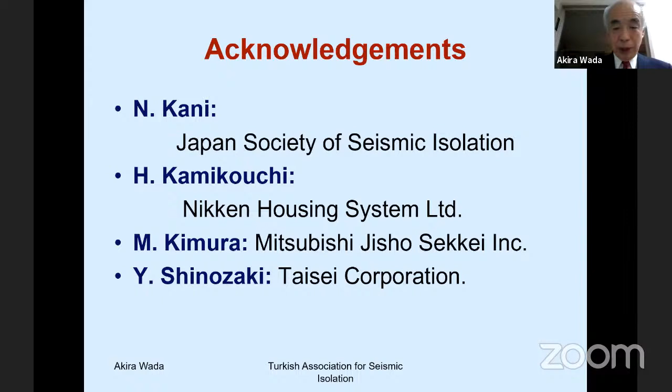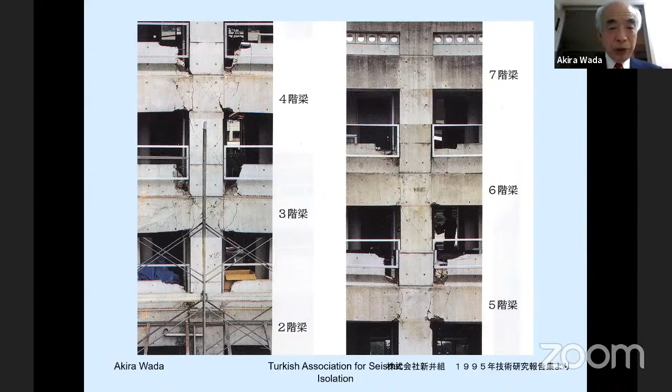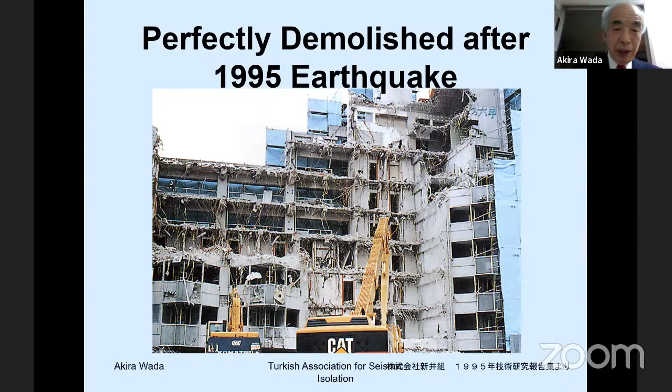After this earthquake, they demolished this apartment building like this. People had to find new apartments, and they lost a lot of money. All the trucks bring a lot of garbage produced by collapsed or demolished buildings.

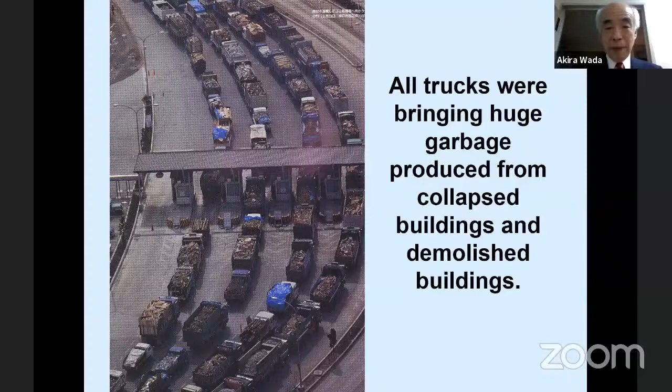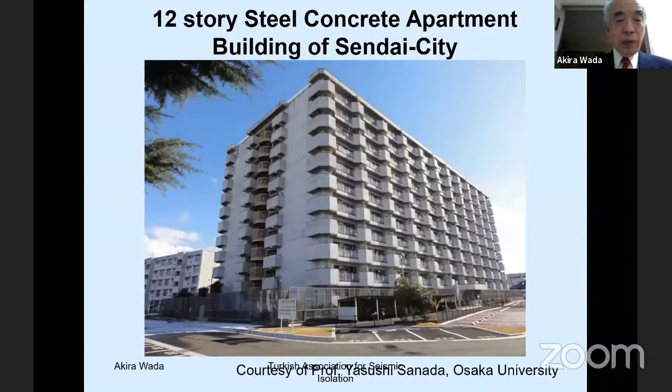This earthquake happened at 3 o'clock in the afternoon. There were mothers and children present; the fathers would not have been there. March 11th was a Friday, and the mothers and children got very scared, so they didn't want to live in the same apartment anymore. This apartment was also demolished.

The young professor, Yasushi Sanada, checked all cracks around the structures. The east frame has 12 columns and 11 non-structural walls. The non-structural wall is a little wider than the column, and the thickness is only 10 or 12 centimeters, with not much reinforcement. The cracks around the non-structural wall are very large, from first floor to sixth floor.

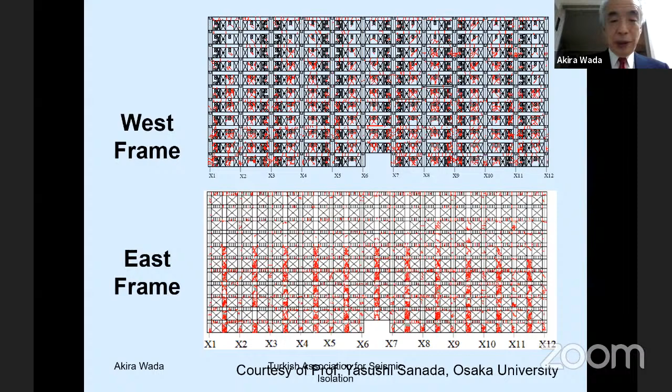On the west frame, there were doors or windows, a very complicated non-structural wall system. Many cracks from ground floor to 12th floor. Also, people don't like to live in this building after the earthquake.

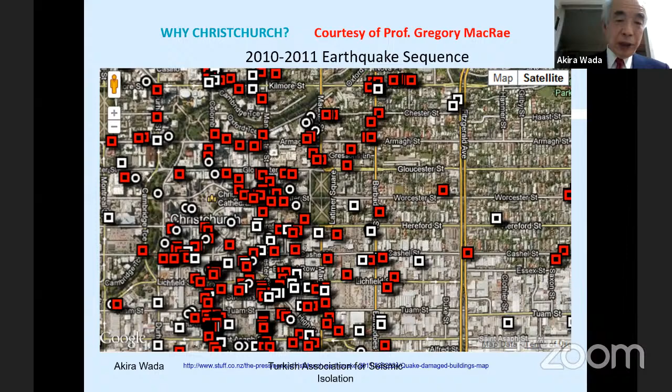There is a very famous university for earthquake engineering, the University of Canterbury. Gregory MacRae is my friend, and he gave me the map of Christchurch. The red square means the demolished building. You can understand that two-thirds of the buildings were demolished.

Our responsibility and our mission were not satisfied. We are structural engineers and earthquake engineers, but after a big earthquake, many buildings were demolished. I don't like this situation. But the professors in Turkey, Japan, New Zealand, and the United States recommend ductile frames to students.

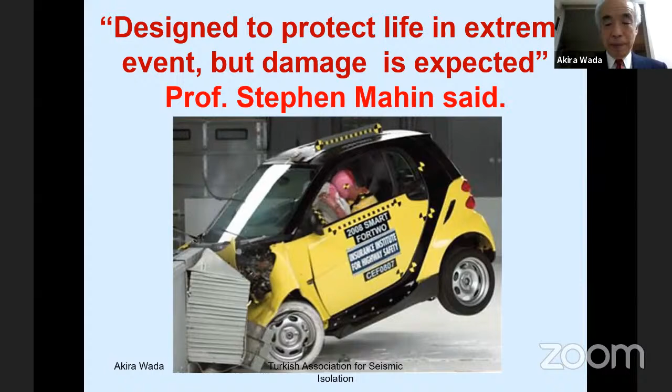I showed several photos after the earthquake. Damage is expected, but people's lives will be okay. But in a big city like Christchurch, Istanbul, or Tokyo, there are too many buildings designed with the ductile moment resisting frame. Many buildings will have some damage, and after that, people don't like to use these damaged buildings. The city life will not continue. We have to consider not only one building, but also the total city.

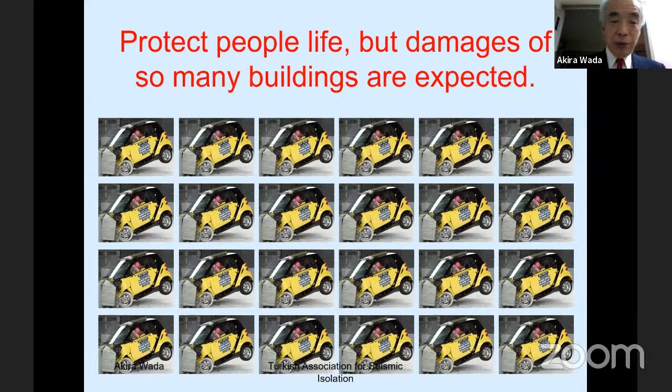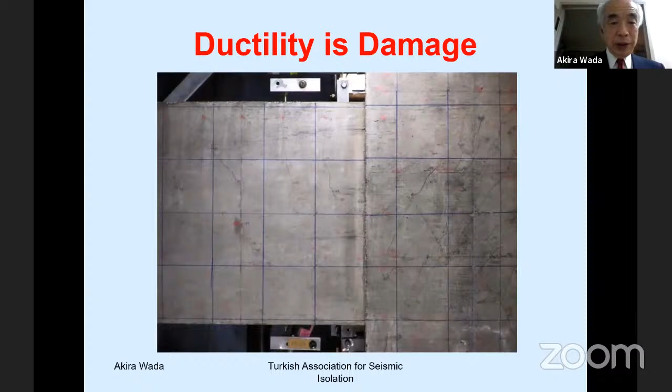I tested this almost 20 years ago. The right-hand side is the column, the left-hand side is the beam. This is very ductile reinforcement, but there are many cracks, not only at the end of the beam, but also at the beam-column joint.

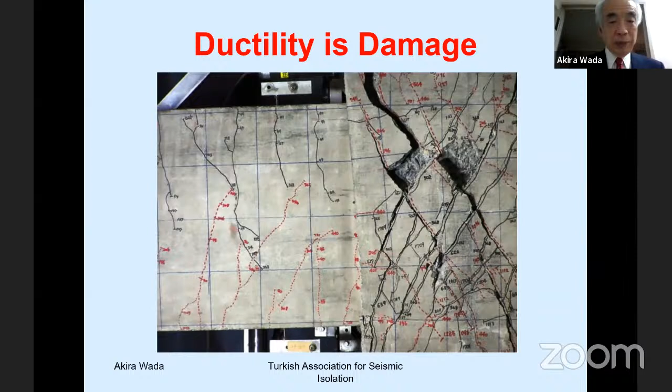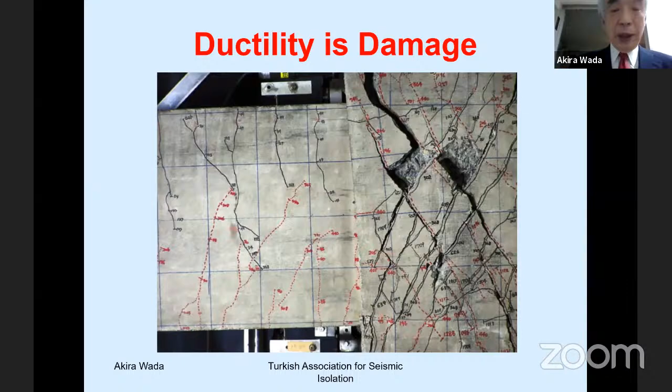Professor Vitelmo Bertero says the ductility is damage. We have to reconsider how to make better structures in earthquake-prone countries.

This is the new seismic design concept: human life has to be safe, and the building should be okay and usable after some repair. People can understand this idea, and some very important new buildings must be usable just after an earthquake—not only government buildings, but also residential buildings. Houses must be safe after the earthquake, since people have to sleep with their family every night.

Many researchers said the house is not so important, that government buildings are more important. But I don't like this idea. The house is most important.

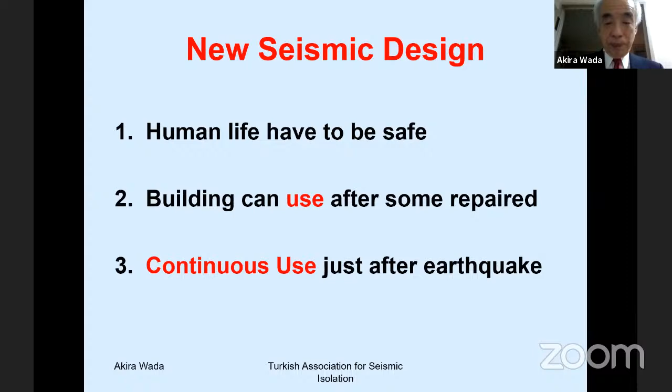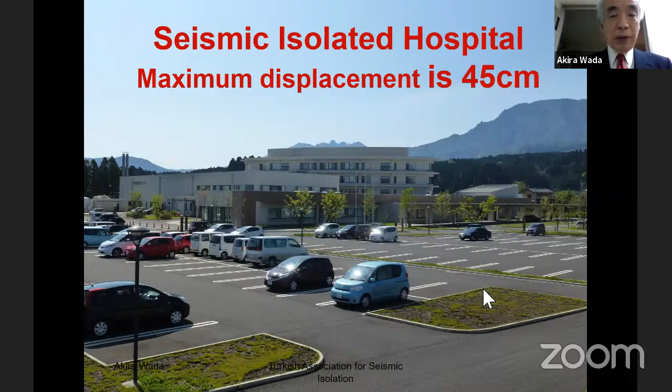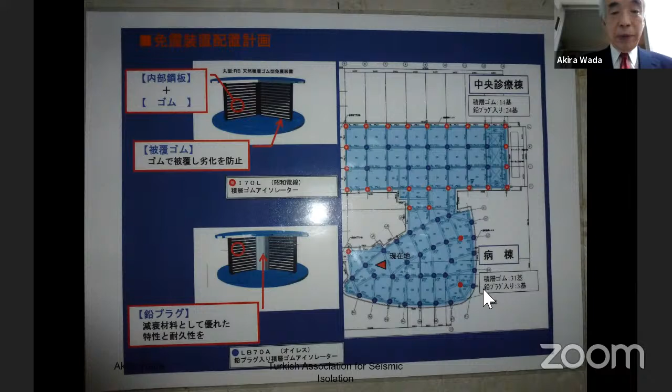The displacement was 45 centimeters from southwest to northeast. This 45 centimeter displacement will be the largest deformation of seismic isolation buildings in the world, I think. But this hospital is perfectly okay after the earthquake.

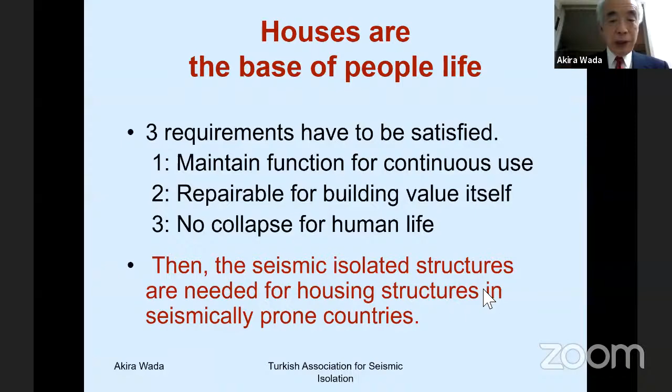And for houses, the base of people's life, as I already explained, we need maintained function and continuous use, repairability for the building's value itself, and no collapse for human life. So seismic isolated structures are needed for housing structures in earthquake-prone countries.

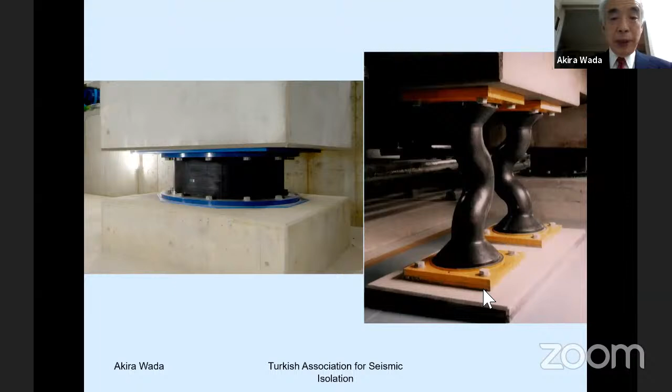In this district, I think there are 6 or 7 seismic isolated buildings independently. The tallest is 12 or 13 stories, the lowest is 5 or 6 stories. But these buildings were designed with seismic isolation, using natural rubber bearings and lead dampers.

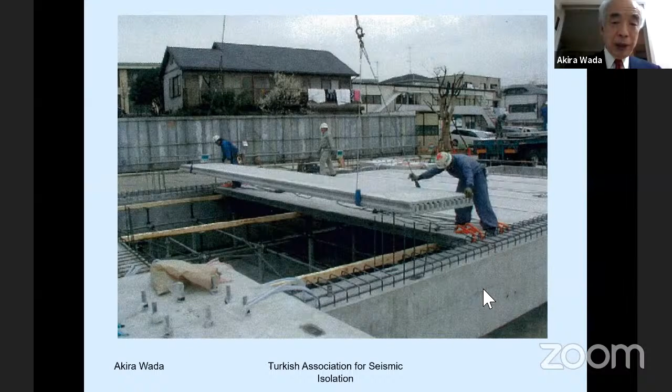When we design apartment buildings using seismic isolation, as you know, the horizontal force is not so large, almost 10% of the weight. The seismic horizontal force is very small compared to a fixed base or conventional structure. So we can use a precast concrete system in Japan, and there are many expansion joints.

About 10-story buildings. When we designed seismic isolated 10-story buildings, design shear force of the superstructure is about 8% to 15%. And the shear force response in isolated layer, including some damping system, is about 13% of the total weight. The floor response will be 0.15 to 0.25 G. Displacement in the isolated layer, 30 or 40 centimeters.

But in the Kumamoto earthquake, 460 millimeters - we have to consider about 50 centimeters, I think. And the story deflection in the superstructure is very small, less than 0.5%, I think even smaller.

And the construction cost when the building is 10-story is almost the same construction cost, or a little cheaper. Japanese reinforced concrete design system is very complicated. We need many reinforcements, not only vertical, but also hoops or stirrups. The fixed base reinforced concrete is not so cheap, and the column is very large.

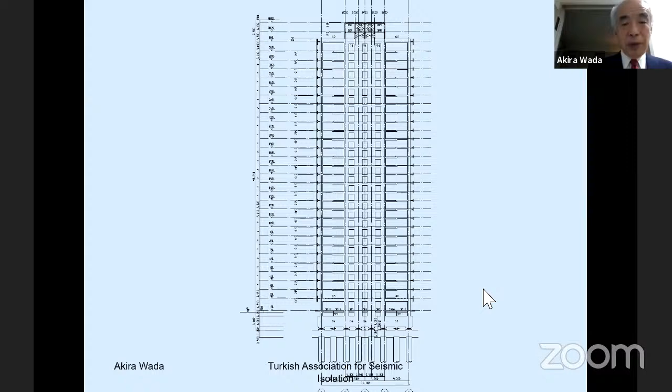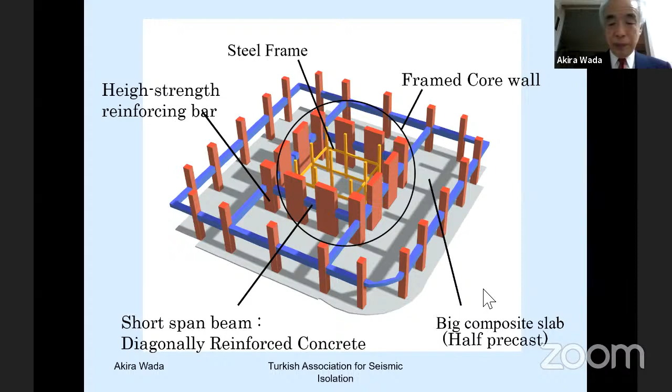Ceiling height becomes very large, and the planning is very free. I recommend this system, not only in Japan, but also in Turkey.

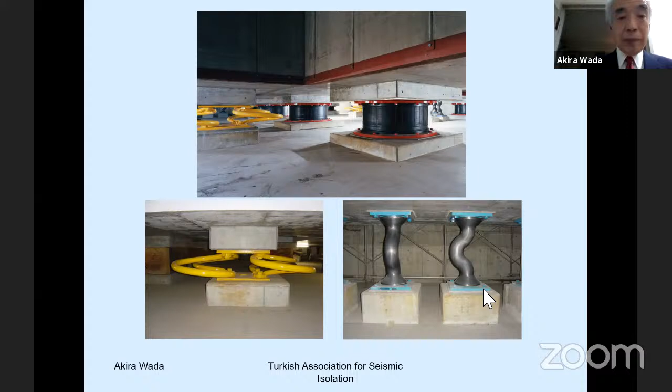This building has used natural rubber bearing and lead rubber bearing, lead bearing, and very ductile steel bearing and damper. There are many rubber bearings and steel dampers and lead dampers, I think.

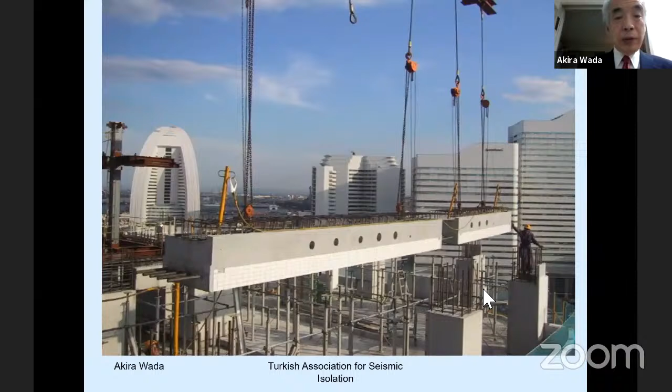This building can use a precast concrete system, and the reinforcement is not so much. We can use a precast concrete system, and the construction time is not so long - very quick construction.

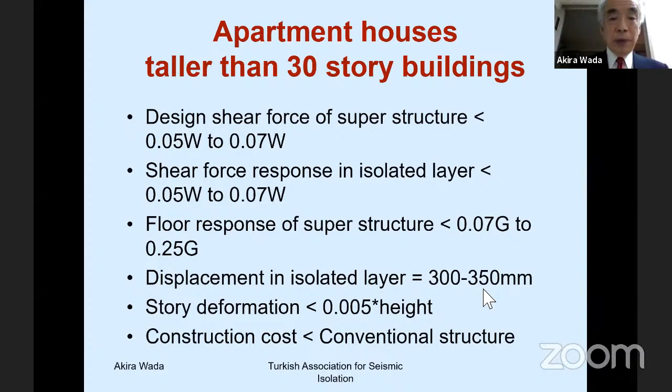When we design around 30-story buildings, design shear force of the superstructure is 5% to 7% of the weight. The shear force response is also 5%. The top floor is some 7% or something. And the isolated layer is also 5 or 7% of the superstructure's weight.

And floor response - the first floor, second, third floor, almost the same value of shear force, almost 7% G, but the top floor, 20th or 30th floor, 0.25 G. And the displacement of the isolated layer is 30 or 35 centimeters.

This displacement will be a little smaller than the 10-story building. The 30-story building itself deforms - the superstructure has some deformation. So the isolated layer's deformation is a little small compared to 10-story buildings. And the story deformation is very small, also less than 0.5%. And the construction cost is cheaper than conventional structure.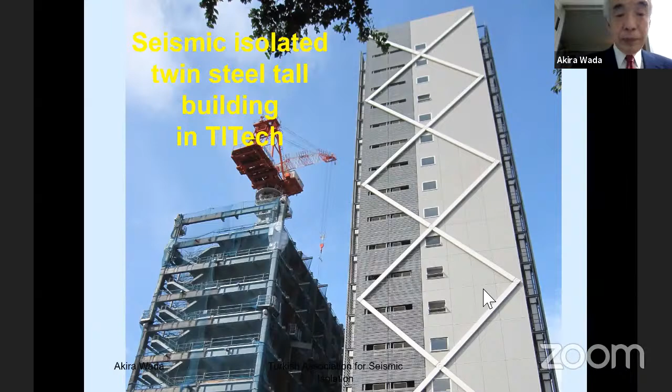But this building is almost 90 meters high, and the width is 16 meters - a very slender building. The corner seismic isolation device will be stepping. We designed the stepping column system at the 4 corners.

The Tohoku earthquake just 10 years ago happened, and the Yokohama building moved something - we had only one chance, the stepping of this rubber bearing. When you come to Japan, Tokyo, I'd like to show this system - very difficult to explain.

This building was designed by Taisei Corporation, and this is the first seismic isolated tall building, taller than 60 meters, in Sendai. The red line shows the floor response. The ground motion is 300 gals, but the first floor, 10th floor and 18th floor response is less than 200 gals. If this building had not been seismic isolated - a conventional fixed base building - the superstructure's acceleration would be 400 gals or 500 gals. Very good system.

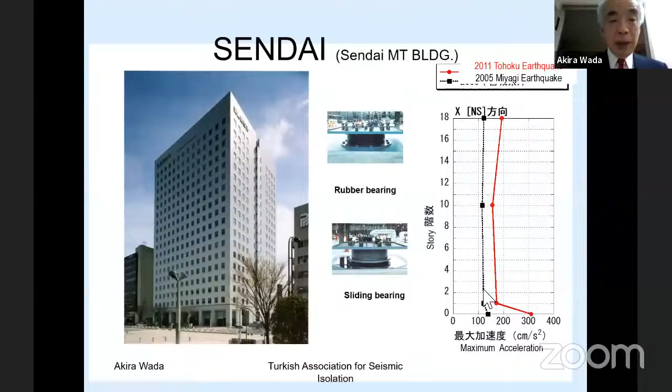This is also designed by Taisei, a very slender seismic isolated prep school in Tokyo. There was also the Tohoku earthquake. The ground motion was 100 Gal, but the superstructure was only 60 or 20. Very good performance.

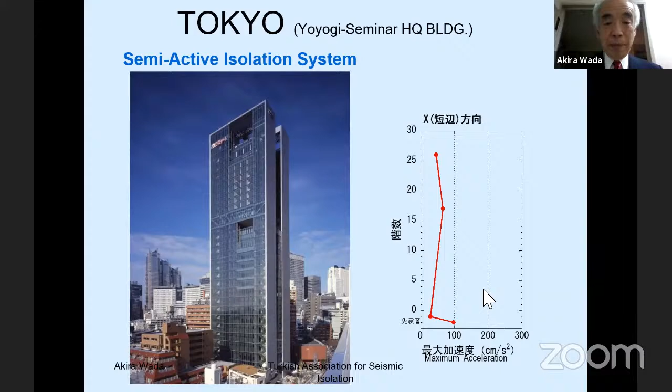I'd like to discuss passive controlled structures. We can call these damage controlled structures. On the left-hand side is the building structure, and the yellow frame is the primary structure.

We can use very high strength concrete or high strength steel now. Turkey, I think, has the same condition. We design a slightly slender column or slender beam because the material is high strength, so the yellow frame can deform elastically with a large displacement, about 1% of the story height.

We put some seismic members, buckling restraining braces or oil dampers, and the earthquake energy is absorbed by these red colored seismic members. The main frame, being slender and high strength, suffers almost no damage.

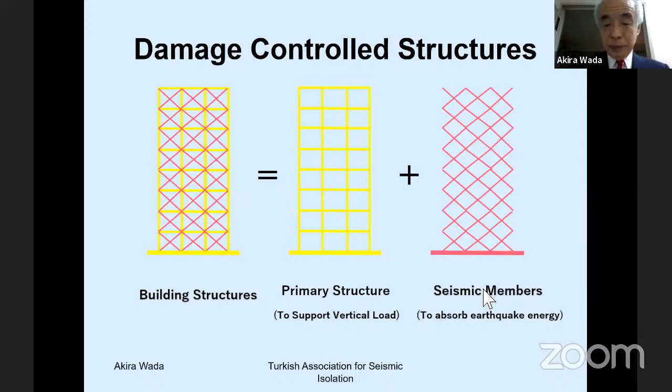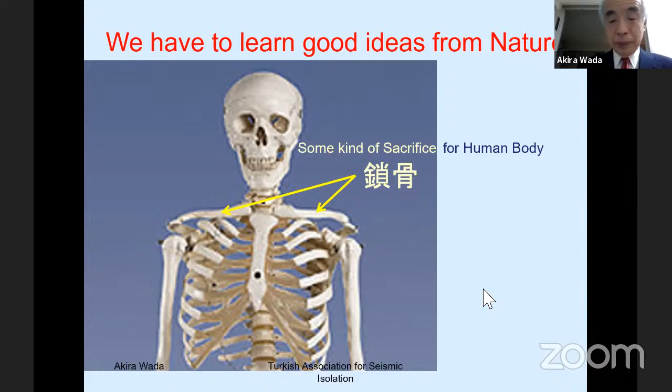This idea comes from the human body - the collarbone will break when a young boy plays soccer, rugby, or judo, but his life will be okay, and the collarbone heals in about several weeks. It's like the bumper of a bus - when a car crashes, the bumper breaks, but the bus itself and the people will be okay.

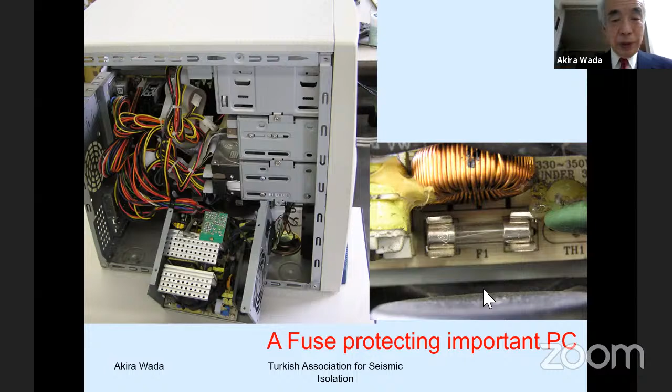And a computer - when a huge lightning strike comes to the house, some component gets broken, but the computer itself is okay. This is the same idea as the collarbone.

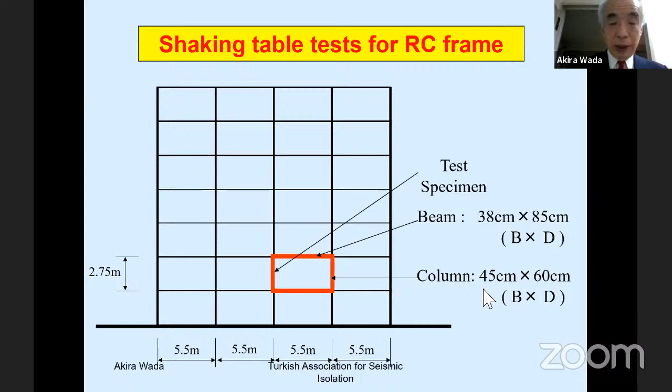We tested a reinforced concrete frame with a damping system using this damage controlled structural system. We took one bay, 2 columns and 2 beams, from an 8-story building, and put this frame on the shaking table. But only one frame is very light, and only one frame is too stiff compared to the 8-story building.

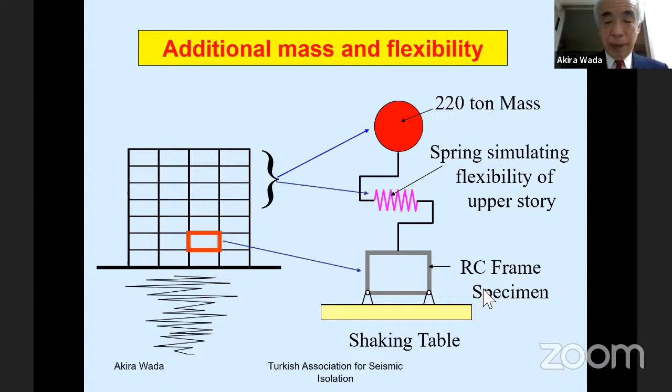We need some flexibility and some inertia mass. So on the shaking table, we put the specimen, a spring, and a very heavy weight. We shake this system, composed of 3 parts, and we can achieve about a 0.6 second natural period.

The specimen size is almost the same scale, I think 90% of an actual structure in Japan, and we need axial force in the column. We put post tension using a rod, and we put a very flexible soft spring washer at the top of the column, between the nut and the top of the column.

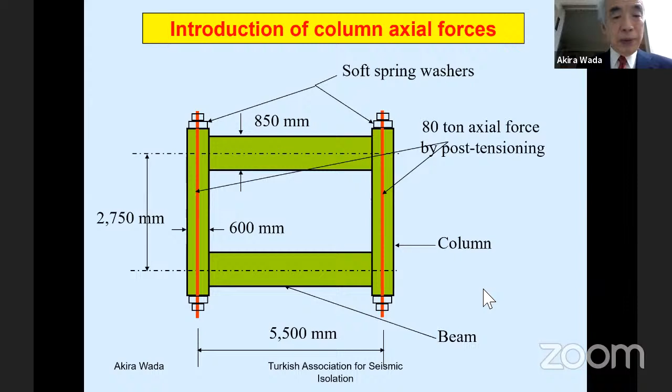We applied axial force constantly. And we put the specimen with a 220 ton inertial mass, the loading beam, and some flexibility from the rubber bearing. The 220 ton inertial mass rests on 4 seismic isolation rubber bearings, very flexible.

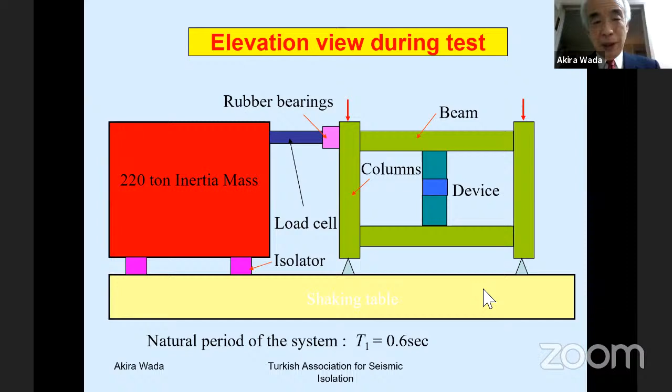When we shake this table, almost all the inertial force comes from the 220 ton inertial mass to the blue beam, the pink rubber bearing, and the green frame.

Here in the city of Kobe, they preserved this tiny fragment of the devastation they suffered in the recent earthquake. Japan stands on one of 900 active faults in the Earth's surface. Here in 1995, one of those shifted and tore this city apart, killing almost 6,000 people. Take a look at the destruction in Kobe.

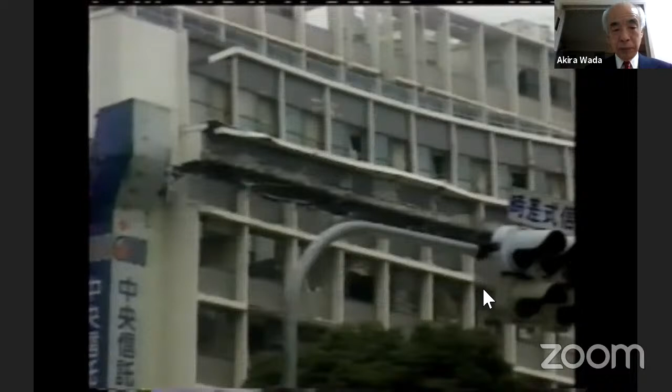Buildings collapsed like a house of cards. Some of the worst hit were medium-sized blocks of offices and flats, 6 or 7 stories high, built before regulations were toughened up in the 1970s. There are thousands of these substandard buildings waiting to collapse across Japan when an even bigger earthquake strikes, and scientists are warning that it's overdue.

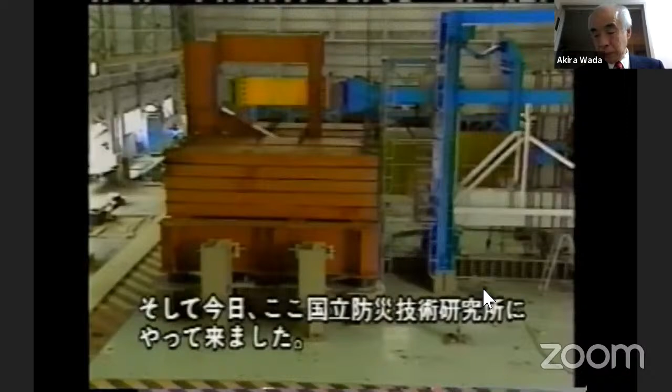The problem in Japan is that we have so many old buildings which are substandard and do not satisfy present codes. If we could rebuild all of them there wouldn't be any problem, but it's too expensive - nobody can do that. So we are trying to find the best possible, least expensive way to retrofit or strengthen existing buildings. Here today at the National Institute for Disaster Prevention, they're going to test a new way of strengthening old buildings.

They'll be using this enormous 250-ton earthquake simulation rig. What matters here is that great big grey oblong of concrete, held up for the purpose of this test by this blue frame. That grey concrete represents a story in an old, poorly reinforced building in Japan, with perhaps a room there - as you can see, the great big gap in the middle would be a room.

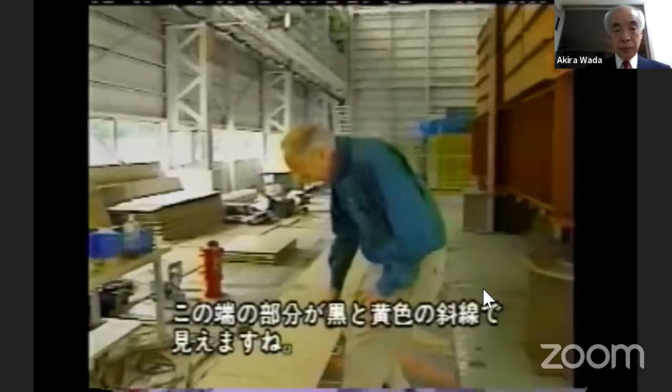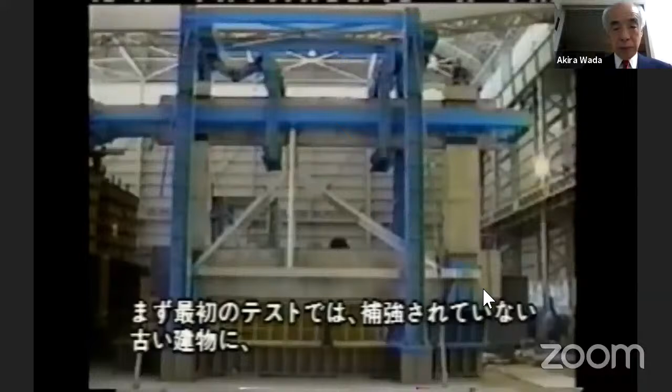The whole thing is placed on what's effectively a great big shaking table, 20 meters by 20 meters square. You can see the edges of it here, these black and yellow diagonals. And the idea is to shake it side to side for all it's worth, like this. You can see here at the sides how there's scope for some 30 centimeters of movement from side to side.

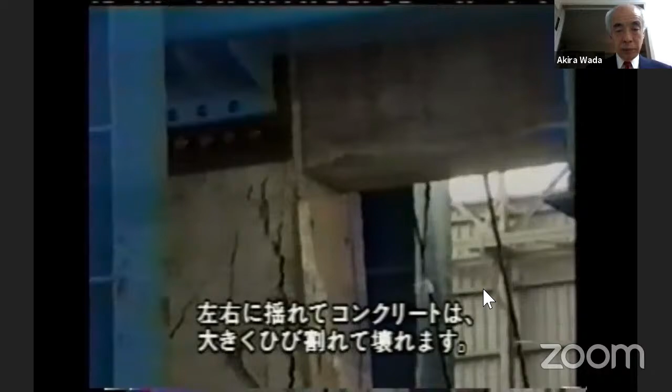In this first test, just look what happens to a traditional, poorly reinforced structure as it's put through the stresses of a Kobe-style earthquake. It rocks back and forth, and the concrete quickly cracks. If it wasn't for the blue steel safety columns, the whole structure would come crashing down.

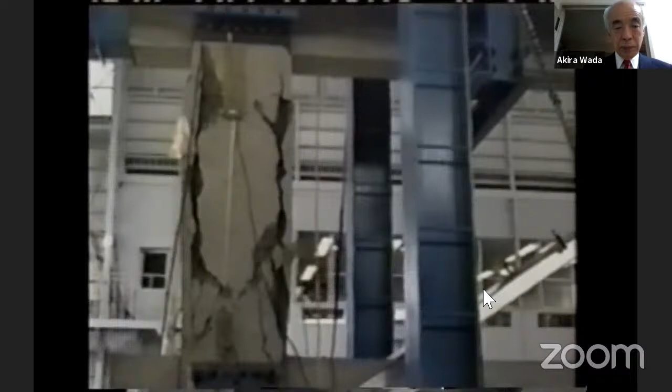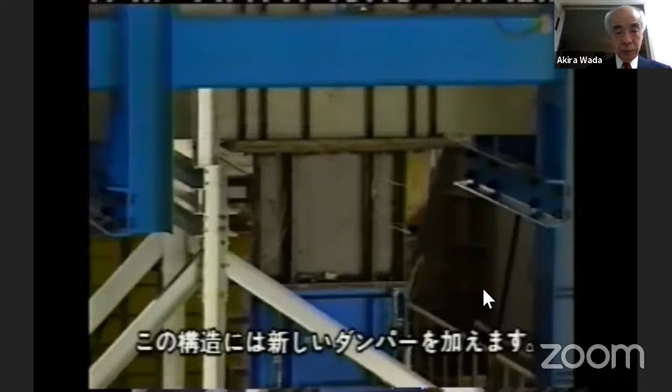Now they know what happens to these kind of buildings in a Kobe-type earthquake, they're ready to test new retrofitting technology. They wire up another sample with laser sensors and transducers, which can all be monitored from the control room. And into that structure, they add a new damping system. It's the brown and blue pillar in the centre of the picture, an extra column specially designed to absorb the energy of an earthquake.

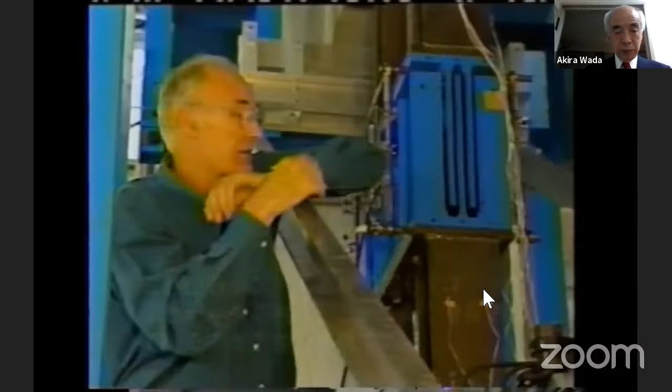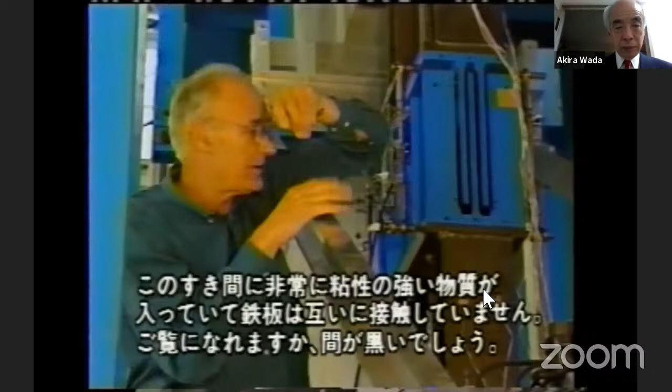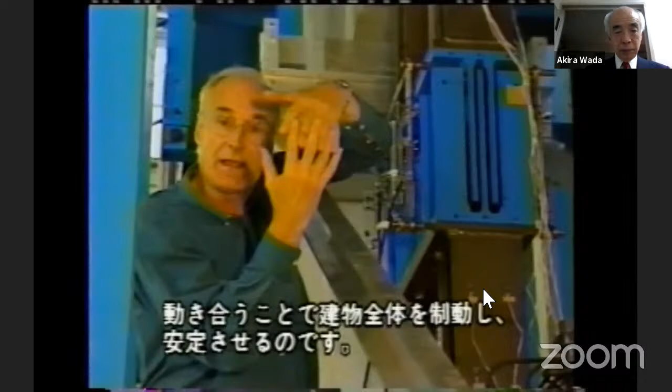So this is the whole secret of the new system. Here's that central column, and coloured blue here are two steel plates, one coming up from the bottom, one coming down from the top, as fingers of steel, which don't quite touch each other, because in between those fingers is a very strong viscous material - you can see it just black in between there. When the earth quakes, that warms up and gets flexible, and that allows those fingers of steel to move on each other, thus providing damping and stability for the whole building.

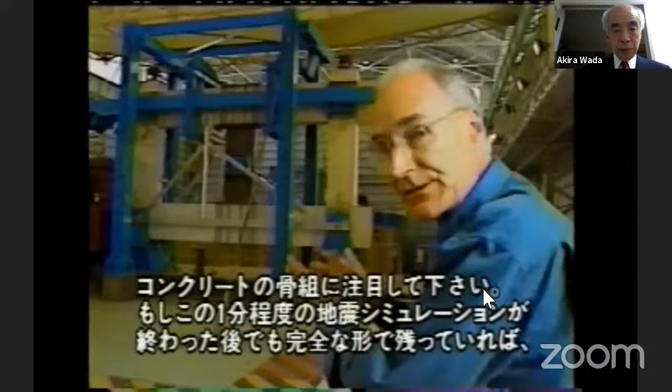Engineers from all over Japan are here to watch the test. They've done their sums, but now the moment of truth is approaching. The test's going to begin any minute now. The red light's on, the alarm's been sounded. Watch the concrete block - if it cracks at all, the test has been unsuccessful. If it stays complete at the end of this minute or so of earthquake simulation, then that damper in the centre there is working.

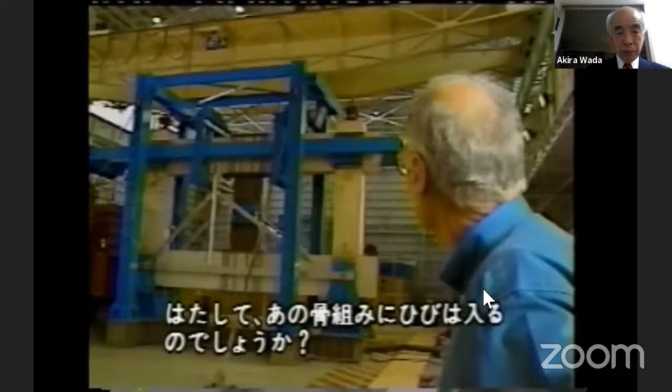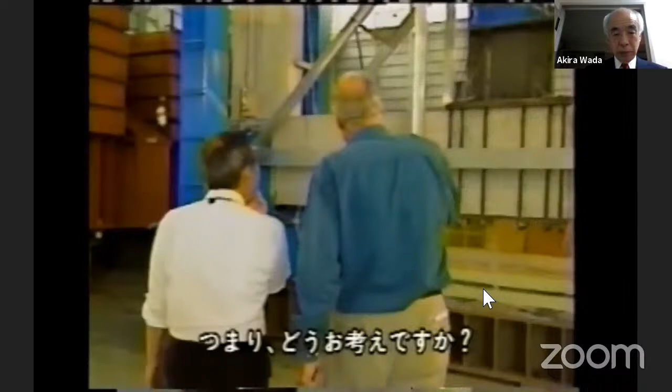They're clapping. I think they think it seems to have worked. Certainly no sign of a crack in that concrete. No sign of any cracks? No. So what do you think? It is a real success. As most of the people over there expected, this energy dissipating apparatus worked.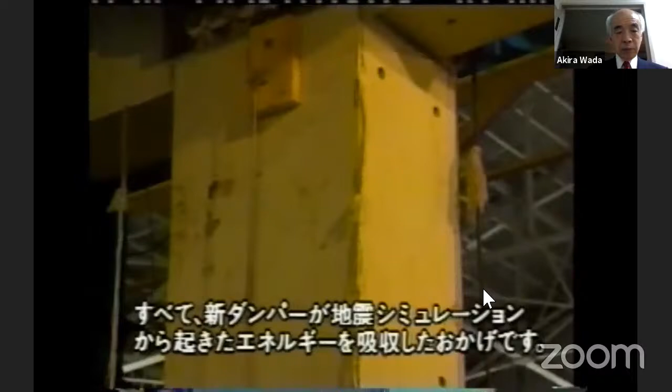All the waiting engineers rush in to have a closer look and see exactly what's happened to the concrete. And you can see for yourself, there's no damage. The upright concrete columns aren't under as much strain. This is all thanks to the new damping device absorbing the energy from the simulated earthquake. Computer printouts confirm a great result.

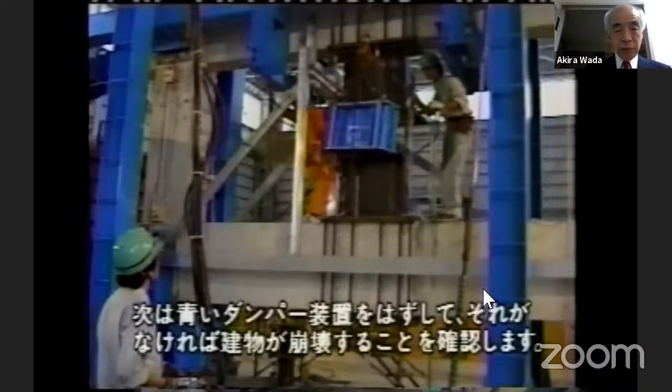Next, they remove the blue damping device, ready to check that the structure will collapse without it being in place. You can see the gap between the brown column where they've now taken it away. Let's see what happens without it.

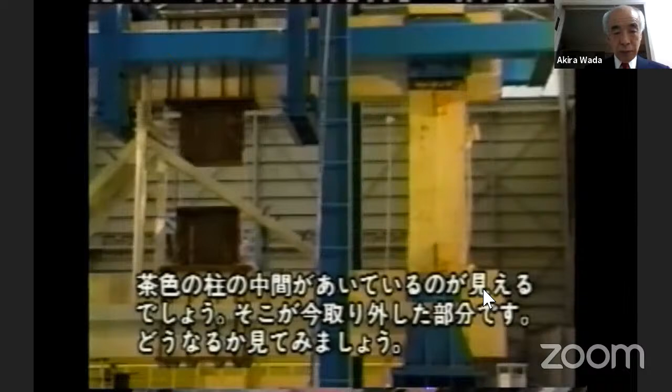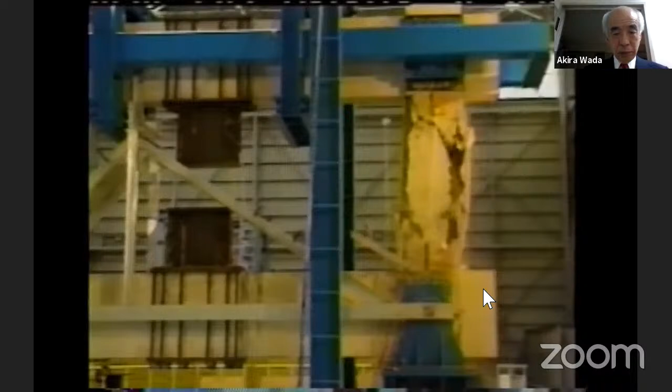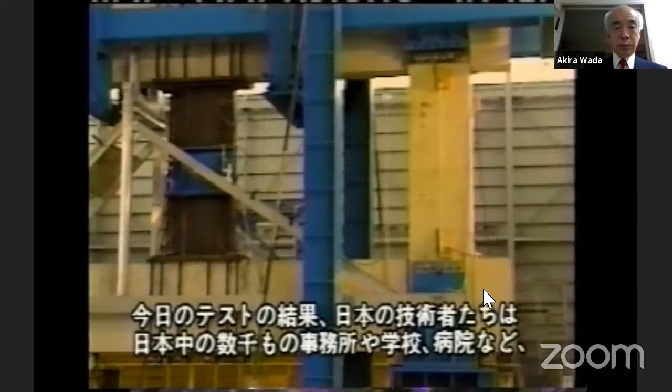So after this day of tests, the Japanese engineers know they've got an answer to making thousands of offices, schools and hospitals across Japan much safer for when the next quake comes. And they can fit those damping pillars without gutting whole buildings. But will they be able to do it in time?

And this test was about 1998, more than 20 years ago. And this is a buckling restraining brace. We tested it in 1987, 34 years ago.

And there are 5 specimens. All specimens have the same core steel plates. You can see only the joint plate on the left-hand side and the right-hand side. And the 5 specimens have a different steel tube - the left-hand side is a larger rectangular steel tube, and the right-hand side is a more slender steel tube.

And between the steel tube and the core member, we put mortar. And around the core steel plates, we put only 1 or 2 millimeters of very flexible rubber. So when tension force is applied in the core steel rod member, only the steel plate will elongate. And when we apply compression force, only the core member shrinks.

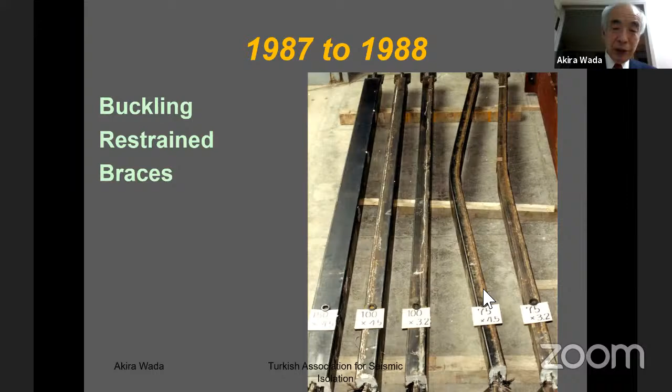We put in some sensors, not using electricity, but a very simple deformation sensing system, on all the buckling restraining braces. After a big earthquake, we can check the maximum elongation using this very simple measurement system, and if there is some problem, we can check and replace the buckling restraining braces with new ones.

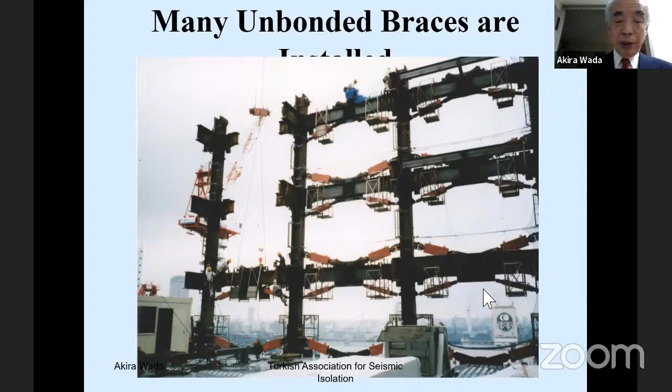Professor Robert Park and Professor Thomas Paulay introduced ductile moment resisting reinforced concrete frames in earthquake-prone countries around 1970 or so. They said this design procedure is capacity design. Japanese professors and engineers adopted this idea. I think Turkey also adopted it, and China, and the United States. They use this ductile moment resisting frame, not only in reinforced concrete frames, but also in steel structures.

These two professors were at Canterbury University, which is in Christchurch. As I already explained, two-thirds of the buildings there were demolished. They used this idea, and after 10 years passed, they rebuilt new buildings in Christchurch. They use BRBs and seismic isolation, and they don't like tall buildings. It's a very similar idea to what we have been studying for these 30 years.

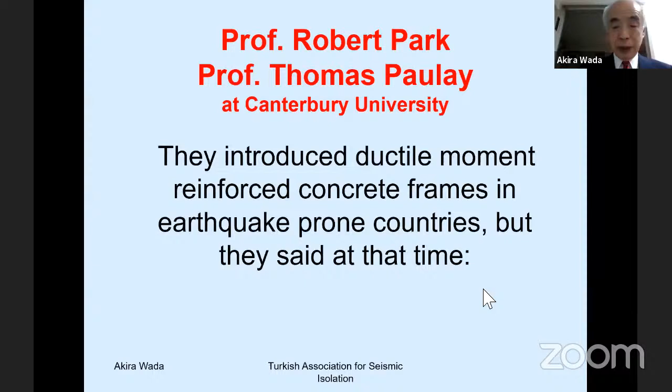At that time, they said ductility is not the final goal. I think the ductility of the buckling restraining brace is important, but I don't like the ductility of a reinforced concrete frame, and I don't like the ductility of a steel frame either. After the earthquake, there remain many damages around the beam-column joint.

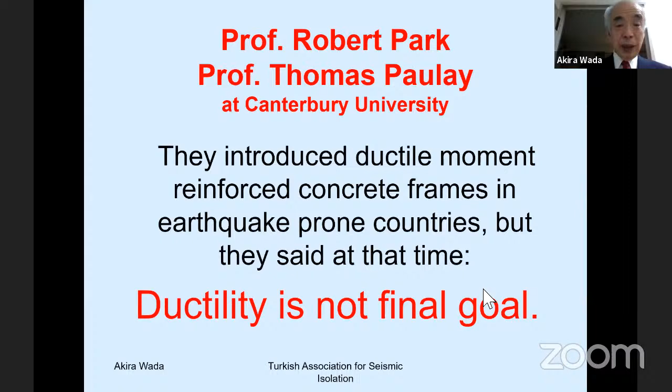I think in Turkey it's also the same situation. Structural engineers and architects designing a building are thinking only about their own building, but the people don't want to return to the damaged buildings. When many buildings are demolished in the city, we cannot stay in the city, and we cannot say that we have made a resilient city.

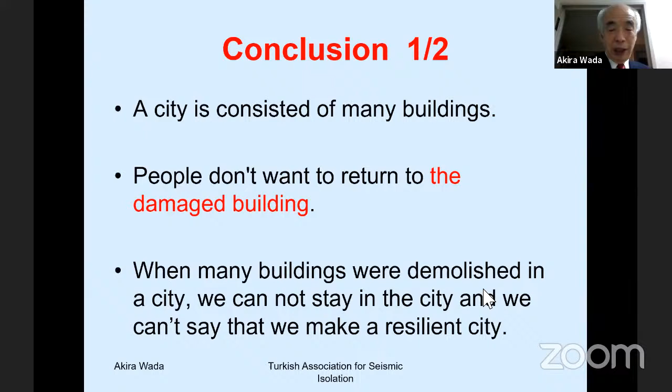Structural engineers, architects, and researchers considering one building independently is not a good idea. We have to think about the city. We have to consider not only the resilience of a building, but also the resilience of a city consisting of many buildings. Then we have to use seismic isolation systems or passive control structures.

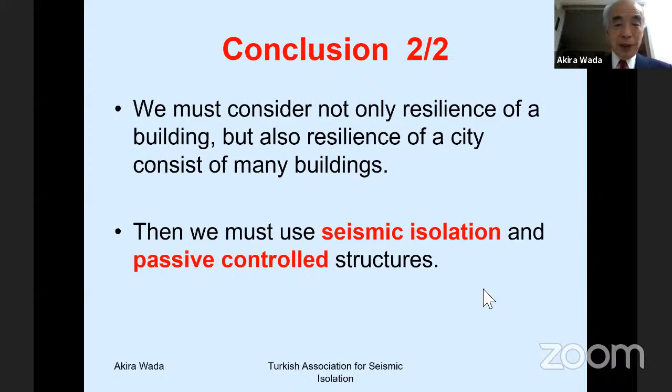Dr. Mehmet and Fatih also promote seismic isolation and passive control structures in Turkey. I'd like to discuss with you continuously. We, as structural engineers, have a mission to make the world a better place to live. Thank you very much for your attention.